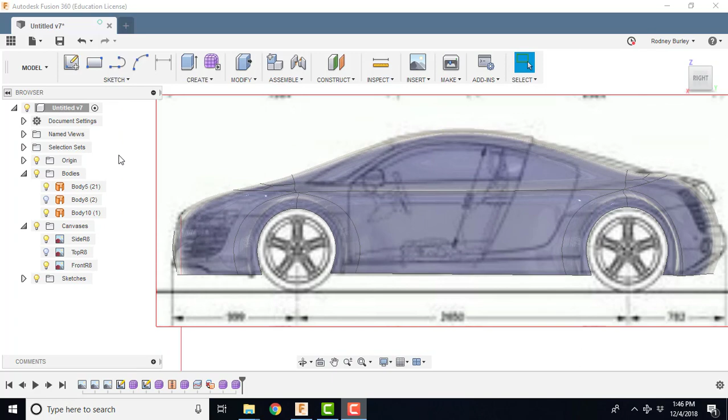So the first thing we're doing is create sketch. My sketch plane's way over there. I'm going to come in here now and create a circle in the center of this. I'm just going to eyeball it. What you could do is draw a line from here to here, divide by 2 and get your exact center. There's other different ways to do it, but that's the way I suggest. I'm just going to eyeball it for right now because it's good enough for my purposes. And I go something like that.

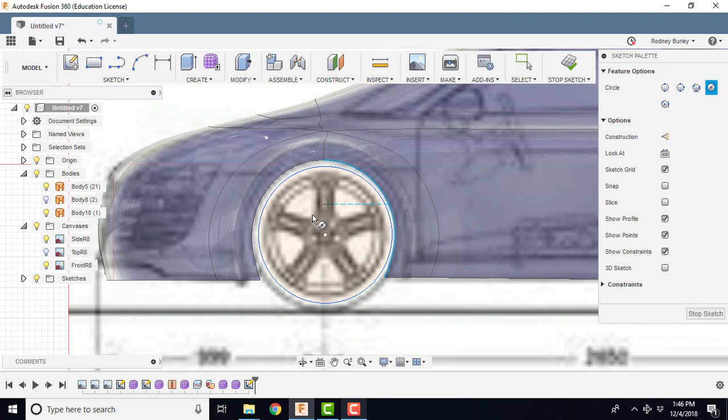Now I'm going to scroll it out, and I'm actually going to do that just a little bit better. I contradict myself, but I want to do that just a little bit better. So I'm going to bring it here a little bit this way and see if I can't get it a little bit better.

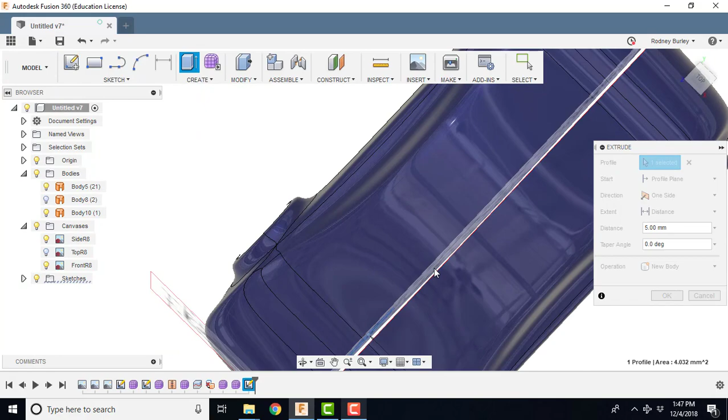Okay, now we're going to right click, press pull, and I'm going to hold the shift key down and scroll across. I'm going to press pull it up to the outside of the car, and the model got away on me there. I'm going to bring it in so it's just a little bit outside of the wheel well, just so it looks kind of cool, like so. And I'm going to go to 2 sides, and take this one and bring it up like that, and that's good enough there for our purposes.

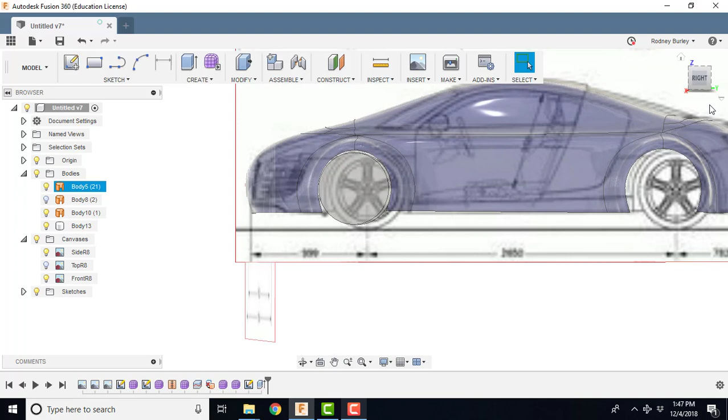Right view. Now I'm going to create the spokes. To create the spokes, I'm simply going to come in here and create a line. First, I'm going to sit on this face, and then draw the line from the center here down, so I know it's in the center of the wheel. You grab the center.

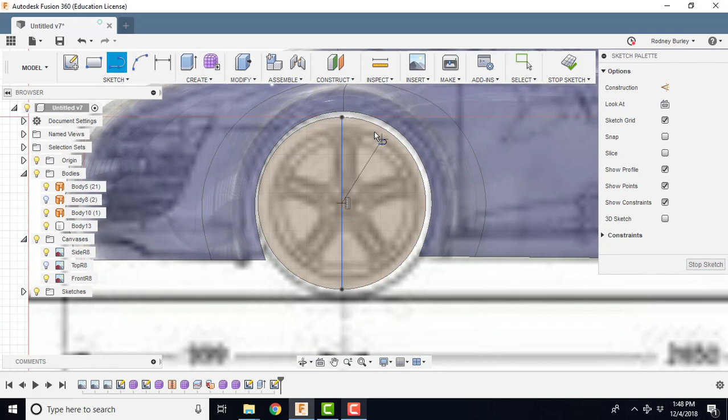Now I want to create 5 of these. So 360 degrees divided by 5 is 72 degrees. The first thing I do is take a line and go to the center here. There's many different ways to do this. I could draw this and then copy them all the way around using the sketch command, circular pattern, tell it to circle from the center, I want 5 of them. That works really nicely.

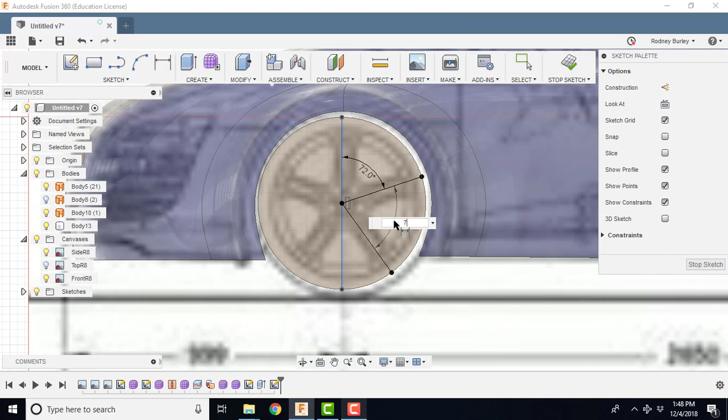But the way I'm going to do it is I'm just going to come here like this and click this line. Now I know the angle between here and here is supposed to be 72 degrees, so I just go 72 and change the angle. Then I'm going to create another line, bring it down for this spoke, click an arbitrary position. Same thing from there to there, and tell it to go 72 degrees. Then I'm going to create another one down like that, same thing from here all the way over to there. From there to there, 72, and then the final line would be coming across this way, and again 72.

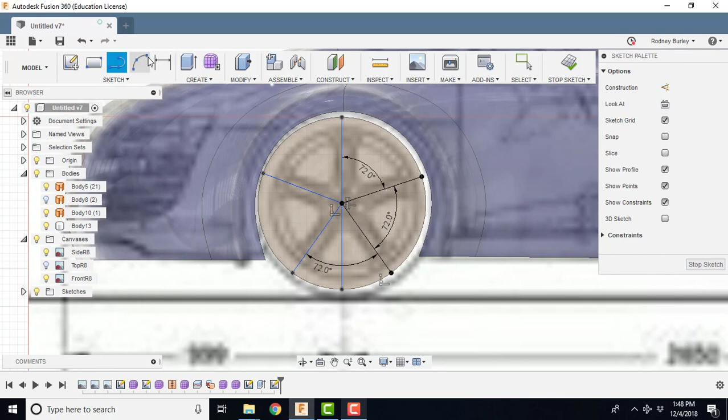Now again, there's lots of different ways to do this. This is just one of the ways I've found works nicely.

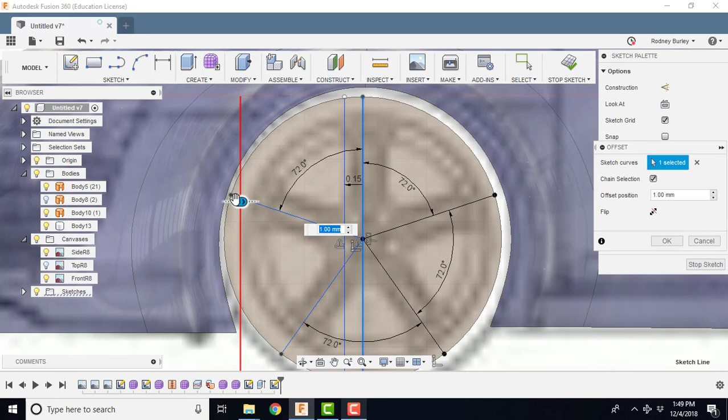Now the spoke is thicker, so I'm going to use the offset command, and select this guy right here, and offset it .15, which I found worked the nicest, and enter it. Then I'm going to do the same thing again, offset this side, and take it to this side this time, .150, and I'm going to do that for all my spokes. So I'll come down to here, click this one here, go sketch, offset, and bring it across something like that. Same thing, .150.

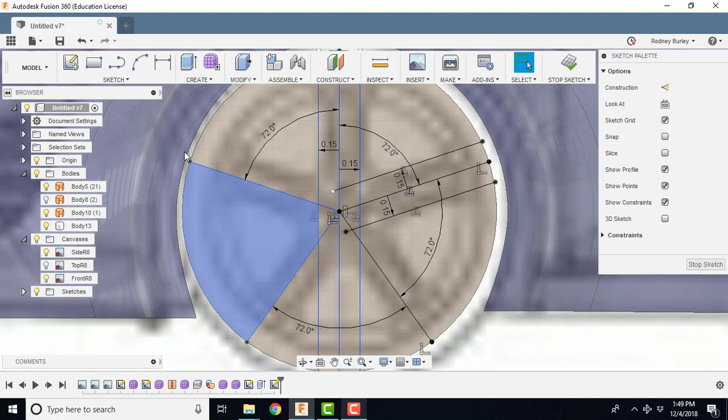Done. This part takes a few minutes. I wonder if I can just control key and try to do them all at the same time. Let's try that. Probably can.

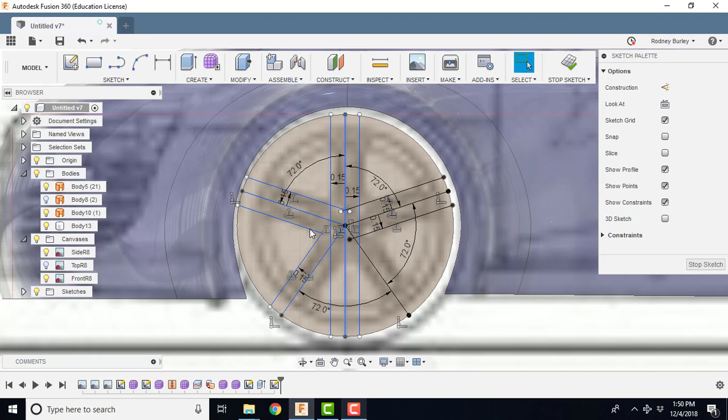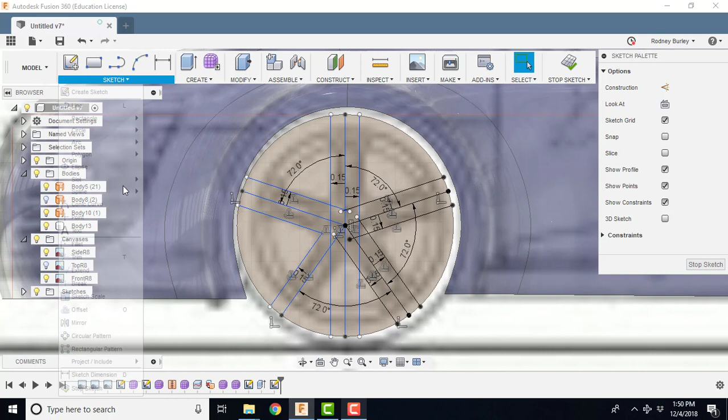Offset. Yeah, it worked. I'm just going to go back and do this way. 0.150, and I need 2 more down here, so we're going to go here, and sketch, offset, drag it way back over there, 0.150, and offset again. If I was doing this a lot, I'd definitely set up a quick key and do it as a shortcut, but I'm not, so that's going to work fine, just like this. This is the last one, I think, and .150.

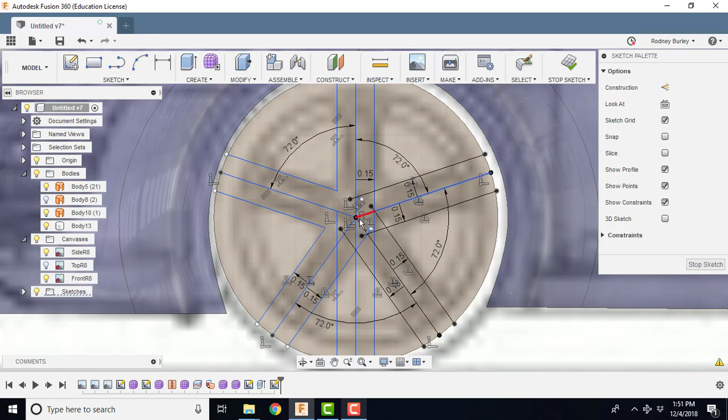Alright, so now I'm going to come in and start trimming everything out, since they're not supposed to be all overlapping. So you go sketch, trim, and you just come in and start cutting off the things you don't need. I don't need that, I don't need the end of this one, and scroll—you want to make sure you don't inadvertently cut one off that you need. So this guy, this guy, this guy. Don't need him, don't need him, don't need him. This guy.

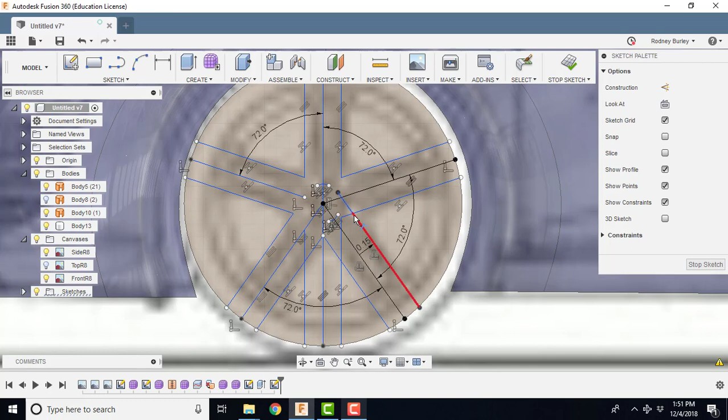Starting to look like it's right. Yep, I'm going to get rid of the end of that one. And I'm going to delete this one, and this one, this one. These are all just basically construction lines. That's right, get rid of him, and him, him, and this one. Cleaning up nicely. Yeah, it looks good.

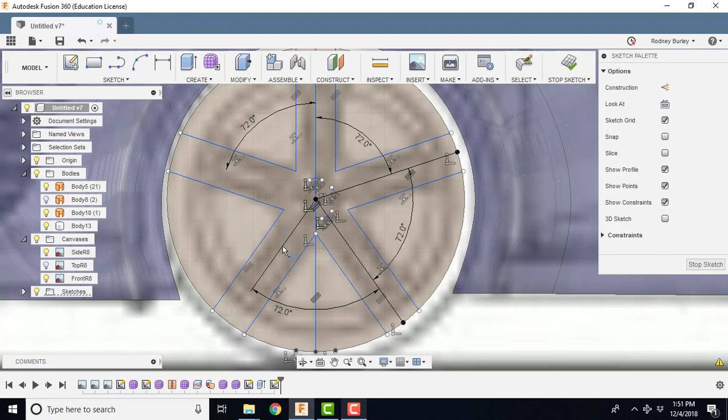So I need all those, I need all those. I don't need the center lines anymore, really—you can leave those, it wouldn't really make any difference, but I'm just going to clean my model up, I think it'd make it look a little better. Now I'm going to come in and get rid of these things in here. I don't need any of those. Okay, and I don't need this, and I don't need this, so I've got my star shape basic.

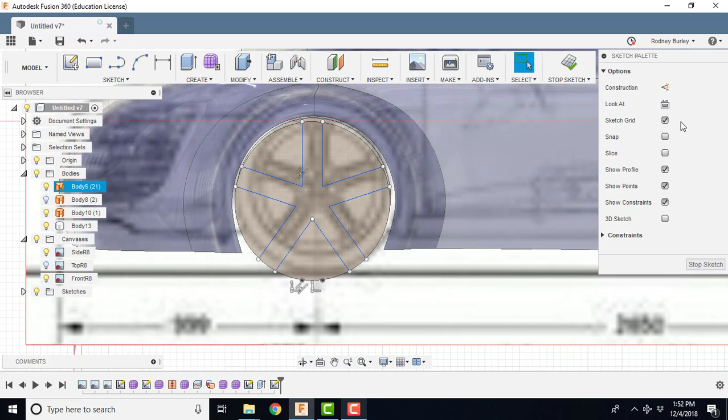Now I'm going to come in here, right view, and do another circle, and find the center of it, and come out to the edge of that right there. You can see where I'm going with that. Then I'm going to do the same thing—I'm going to come in and trim off all these edges here. I don't need that or that.

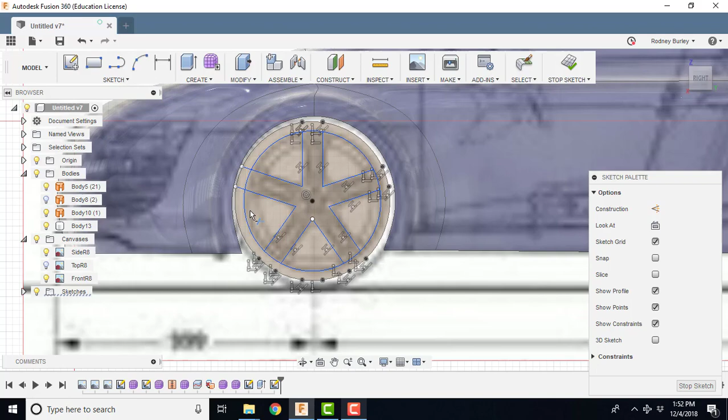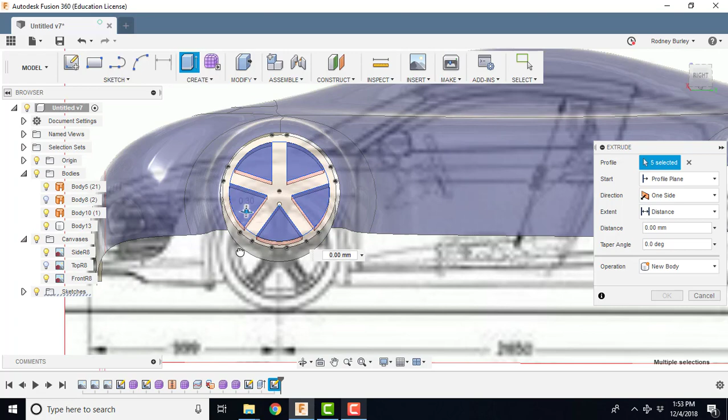Okay. Now that looks fine there. I'm going to stop the sketch, and now I'm going to right click, press pull, and I'm going to hold the control key down. I'm going to select all these pie shaped things, and drag them through, and use it to cut. And now I've got the wheel cut. It's starting to look like a wheel.

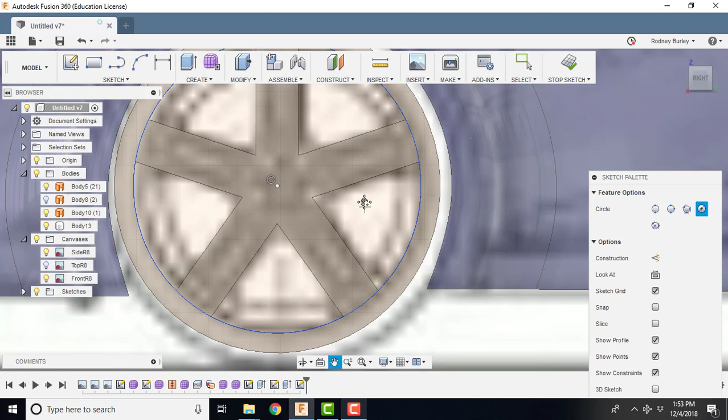Now I'm going to inset this part, so I'm going to go sketch, create a sketch, sit on the same face. I'm going to take the circle tool, come in the center, and come right out to there, which is what I've done previously, like that. Now I'm going to right click, press pull that one, and take it down to this one, press pull, and pull it down in negative to create an undercut such as that. So the wheel would be kind of inset like this.

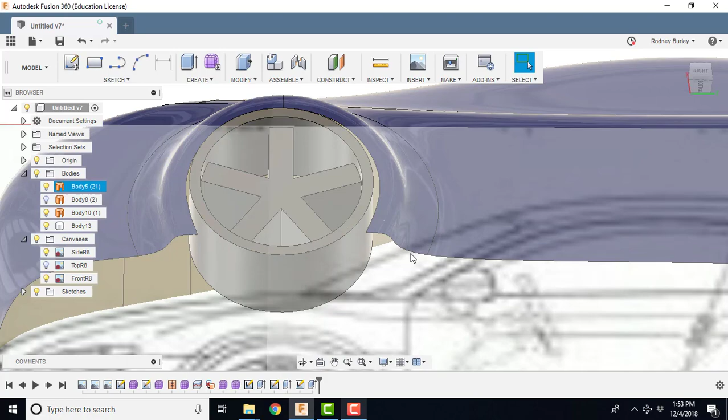Yeah, now it's starting to look like a wheel. I'm going to start to modify it. I'm going to go modify, fillet. I'm going to select this guy here, and say make him maybe decimal 1. Let's try and see how that works. And it looks pretty good.

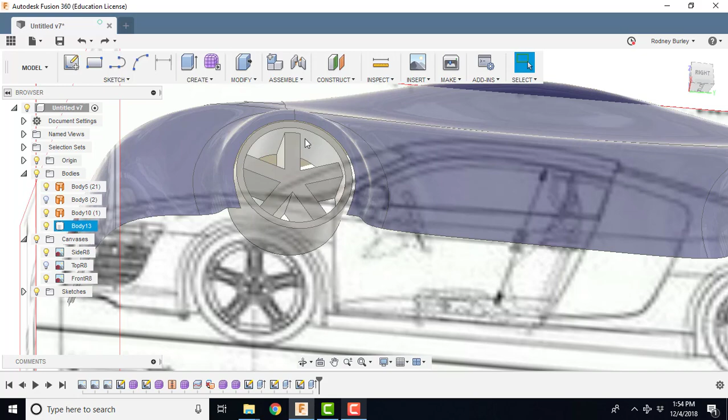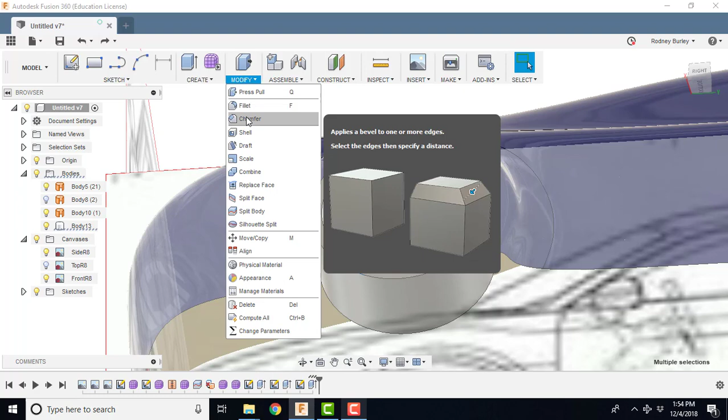So I'm going to select them all—you can make it slightly bigger than decimal 1, I could probably. So I'm going to select him, control key down, same thing. Control key down, select him, deselect that one. I'm going to select all these guys, select this guy, control key down, select this guy, and same thing, control key down, select this guy, and go modify, fillet, and maybe make it decimal 15 and see if it looks a little better. Yeah, maybe decimal—I'm going to go back to decimal 2, see how that looks. Now decimal 2 looks quite nice. You can drag this thing around too, but you have much more control when you do it this way. And I click OK. It's starting to again look like a wheel.

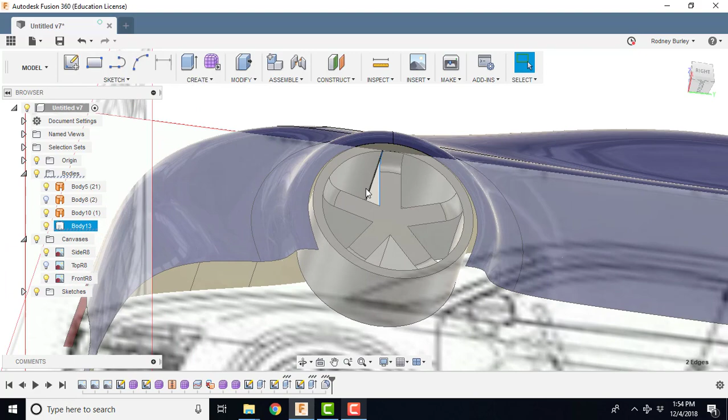Now I'm going to radius off these things. So I'm going to select, control key down. I'm going to select these guys here, all these pieces.

It takes a few seconds to select them all. Control key down so I don't lose it.

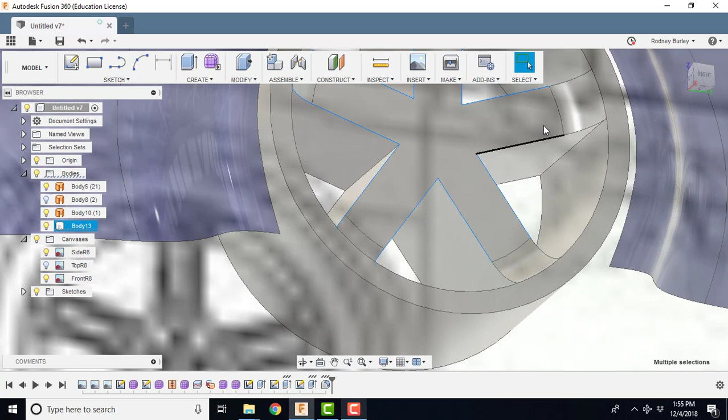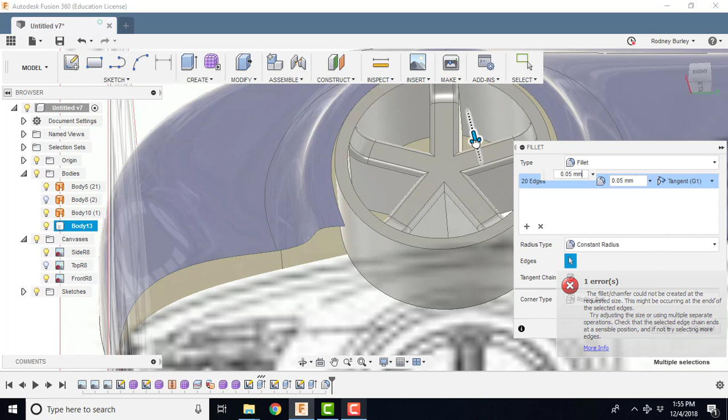I haven't missed anything. Okay, modify, fillets, and let's try. I can drag it just to see for a second, just to see where it goes. You can see if I go too deep, it causes an issue, right there. So now I can bring it back a bit. Decimal 0.05, you see 0.1. 0.1 looks pretty good. Click OK. And now you can see it's modeled.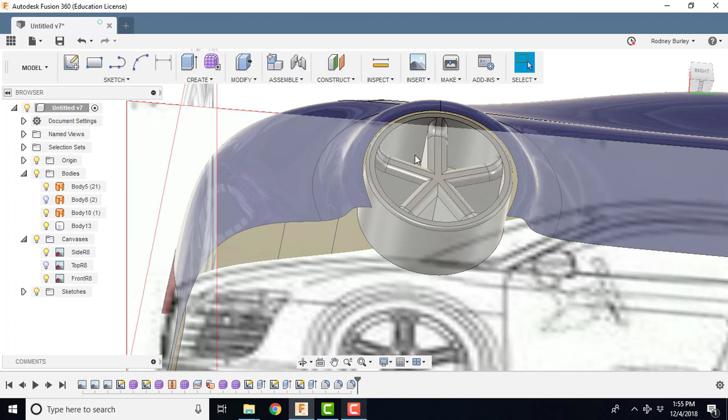Now, obviously this edge here would modify that edge, and I would put a fillet on it as well. Decimal 1 maybe, or that's probably a bit aggressive. Decimal 0.05, let's try that. Looking a little bit more realistic. Same thing in here, I'd come in here and I would modify that, fillet there, 0.05 as well.

So it's starting to look like a tire, starting to look like a realistic vehicle. If I can get back to where I'm supposed to be. There we go. So what you do is you model one wheel completely.

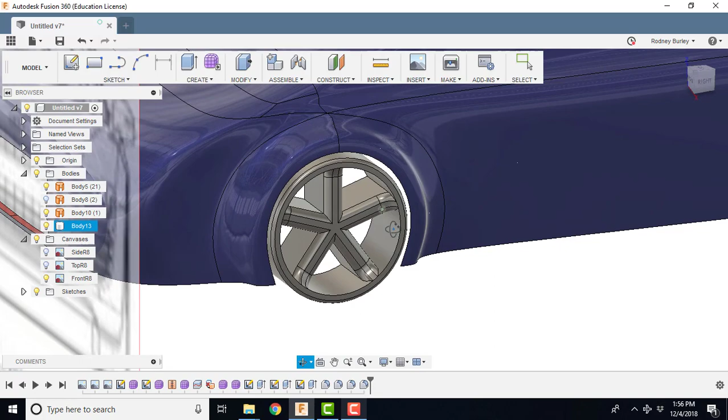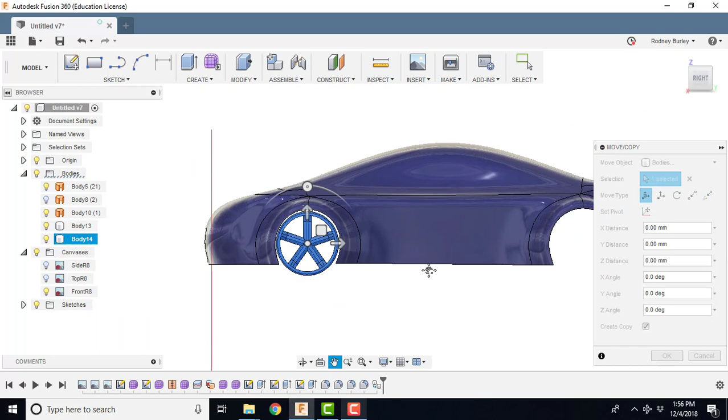I shut off the side just so we can see it better. You model the one wheel completely, and then what you do is you copy it sideways. So if I go in the right view, I right click, I move copy, I select the wheel, I scroll right in so I get the right spot, right there, and it turns it all blue, and you can see create copy. And so now I would simply drag that one back this way, like so, and click OK.

And then what I could do next is I would go here, top view, even this way, and I'm going to go into my body. I'm going to shut the body off of the car so I can see it better, and I'm going to highlight these things.

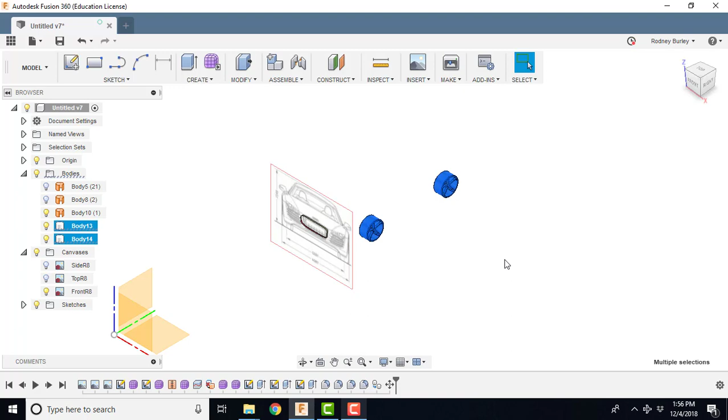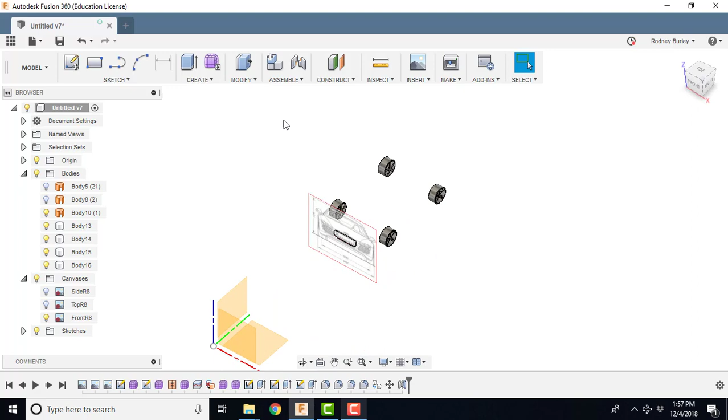So there's are highlighted, and I'm going to go to modify and to mirror, create mirror. 92 faces selected, that's all of this. Then I have to tell it where to mirror it from. So I want to select this is where I mirror it from, click OK, and now you can see I got 4 wheels. And I can then come back and turn the body back on, and you can start to see my car is starting to look like a real car.

Now you can come in, what my expectation would be was you come in and you would play around with the colors. So even though we're going to 3D print this and we're not going to be able to do any colors, we can still play with the colors, and it makes it really look cool.

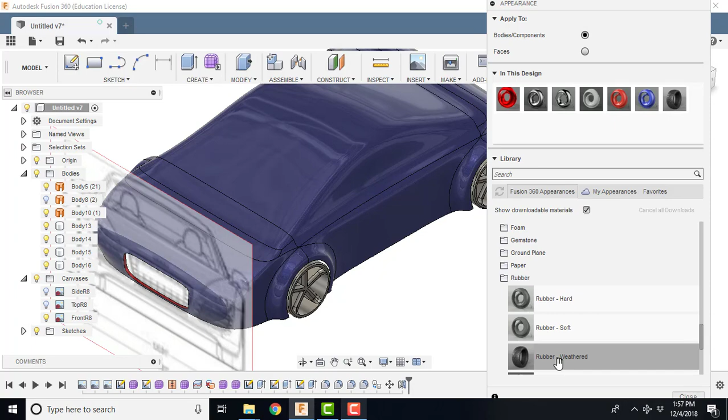Come into appearance, and you can click on, if you go down, you can find rubber on one of the appearances down here, rubber soft, rubber weathered, and then you can change it. So I'm going to go like this, and I'm going to go rubber, and change that to rubber, so you can start to see it's rubber.

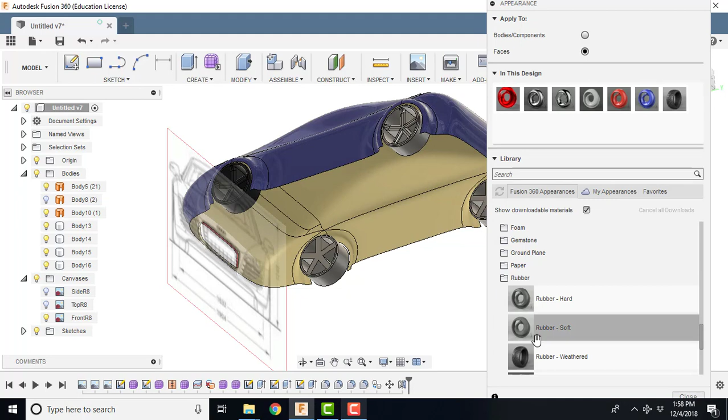I'd come back in, actually I just did the whole body, but I would select faces and just do the face of that rather than turning the whole thing. So faces like this, and then you come down and just get your, like this, like that, and you just do the face. So now you can see it looks more realistic, it looks like a car.

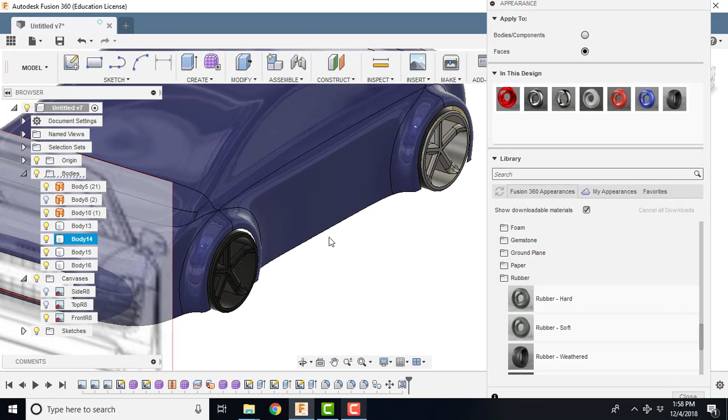I would actually come in and do this face too, right? So you can select that face and change that. So you leave the center of the car chrome and do those. You can also do all kinds of different things with bringing in decals and so on. But now it's starting to look like a car.